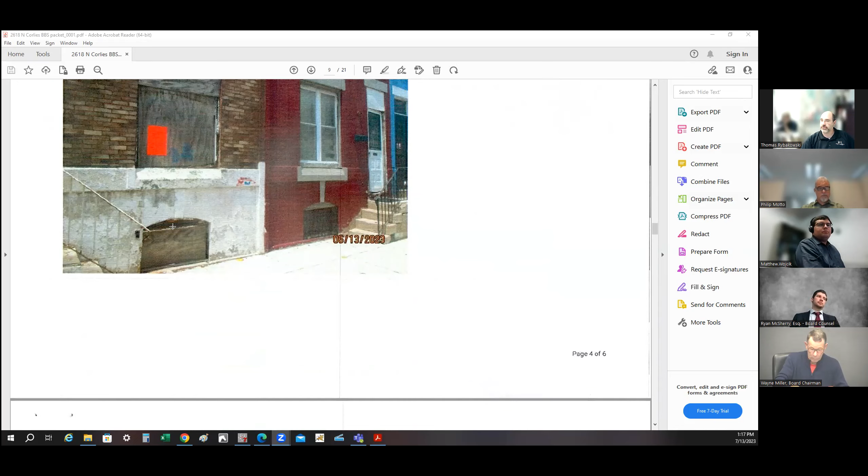It's a little blurred, but it does show the posting of the front of the property. That's a photograph of the front of the property with the posting on the front plywood that would be affixed to where the front window would be.

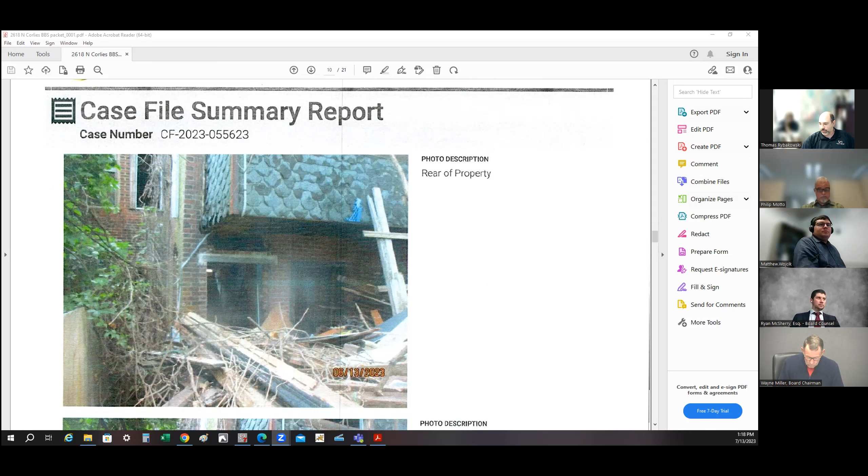This is one of the areas of concern: at the rear of the property, you have an opening in the rear exterior wall where a lintel looks to be in the process of being replaced, but there's an opening above that. And then you also have an opening in the exterior wall on the breezeway above in that masonry wall. That's another illustration of the back of the property.

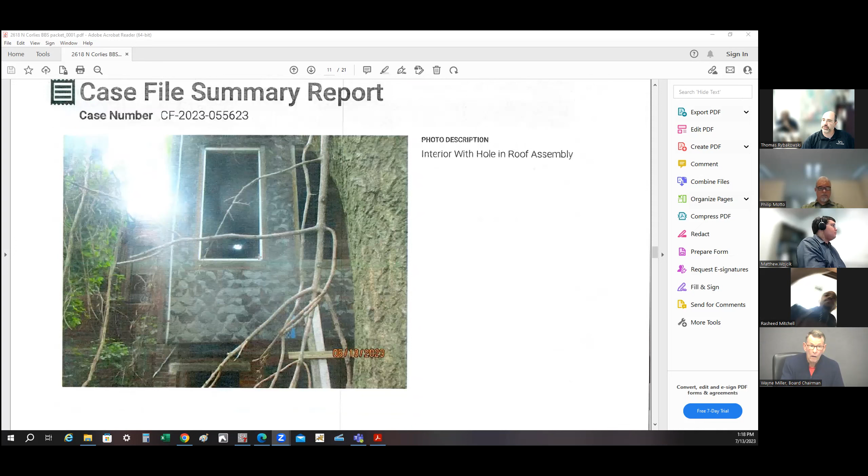This is a photograph taken of the rear bay showing that there is an issue with the roof assembly of the property.

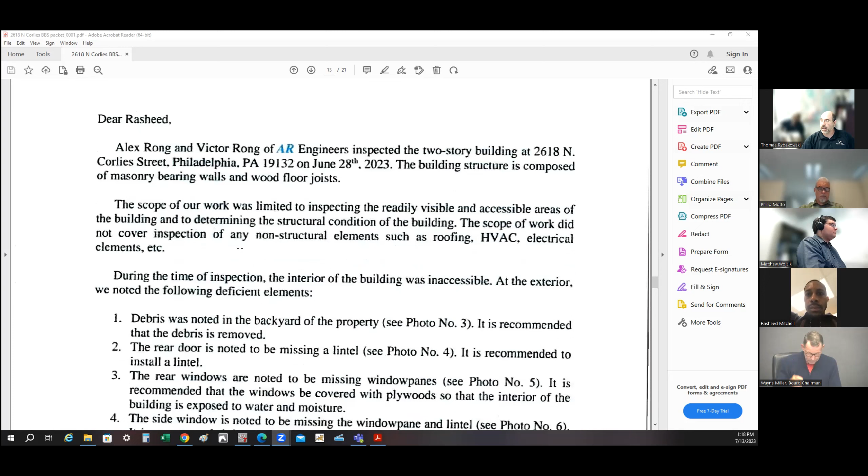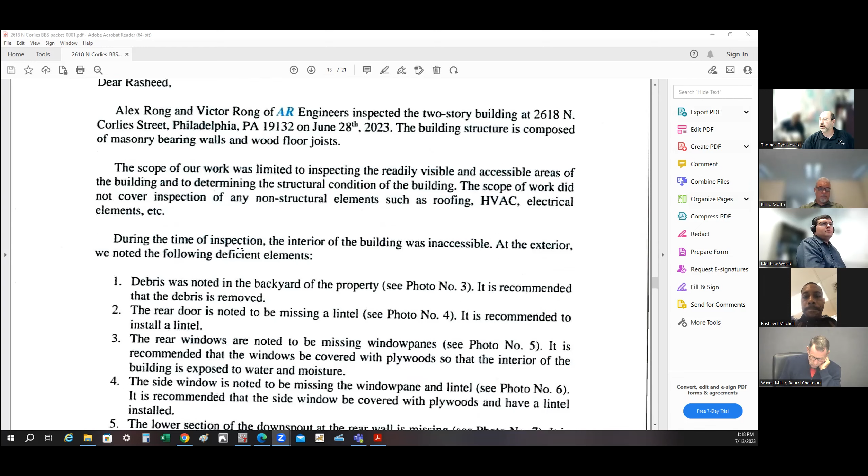This is the engineer's report that was provided to the department. The engineering report is dated July 7th, 2023, and was conducted by Alex Rong and Victor Rong of AR Engineers, who inspected the two-story building at 2618 North Corlies Street on June 28th of 2023.

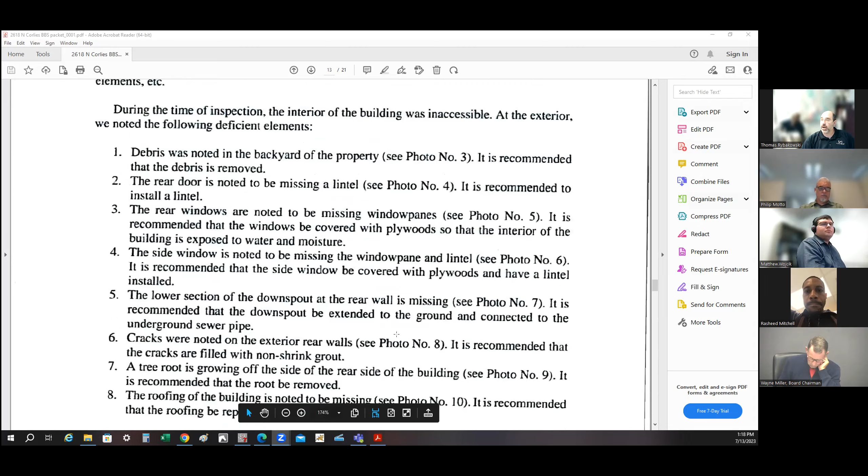It gives a series of 8 different bullet points that they would like to be addressed. In the description above the 8 bullet points, it states that during the time of inspection, the interior of the building was inaccessible. At the exterior, we noted the following deficiencies.

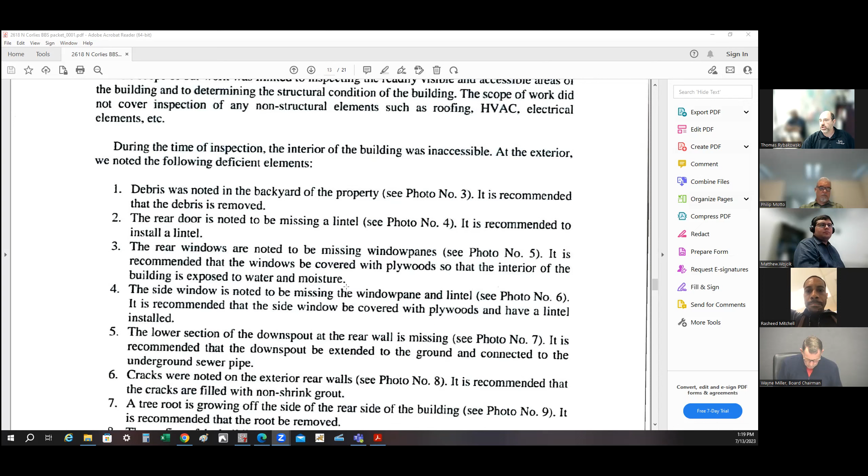You can see from the rear of the property that there is an issue with the main roof. Bullet point 8 shows the roofing of the building is noted to be missing. See photo number 10. It is recommended that the roofing be repaired and installed.

The engineer himself states in the document that they never made entry into the property, so we do not know the extent of the repairs needed. The property has been deemed imminently dangerous.

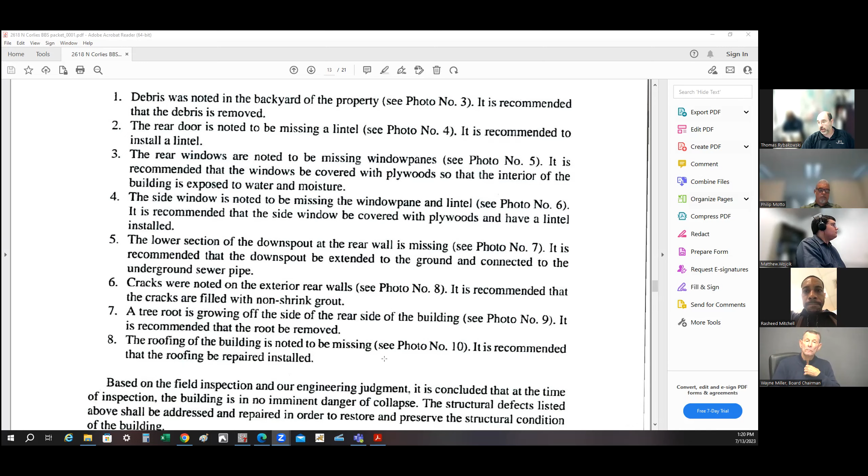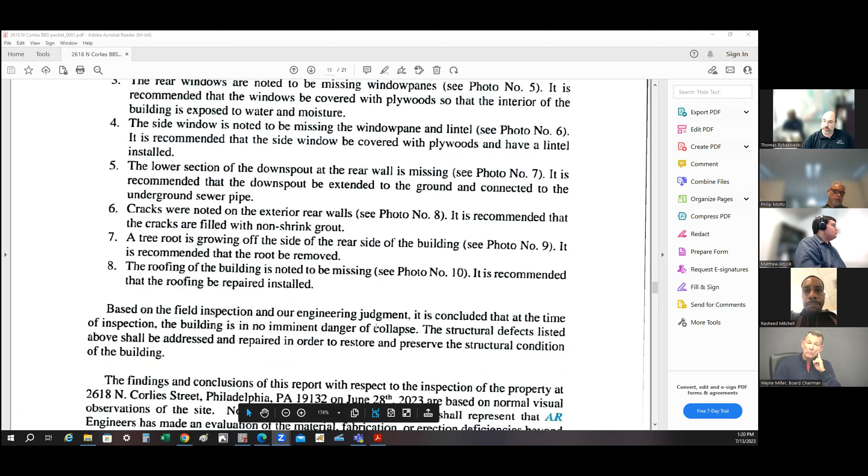It is a 2-story row home in the middle of the block. It does pose a threat to the public and to any occupant. With that said, we would be looking for an updated engineering report for the interior and exterior conditions of the property, and also plans for the repair, given that this property was deemed imminently dangerous.

We are looking for a permit to be submitted and under review in the department's hands within 30 days. Okay, Tom, I have a question for you.

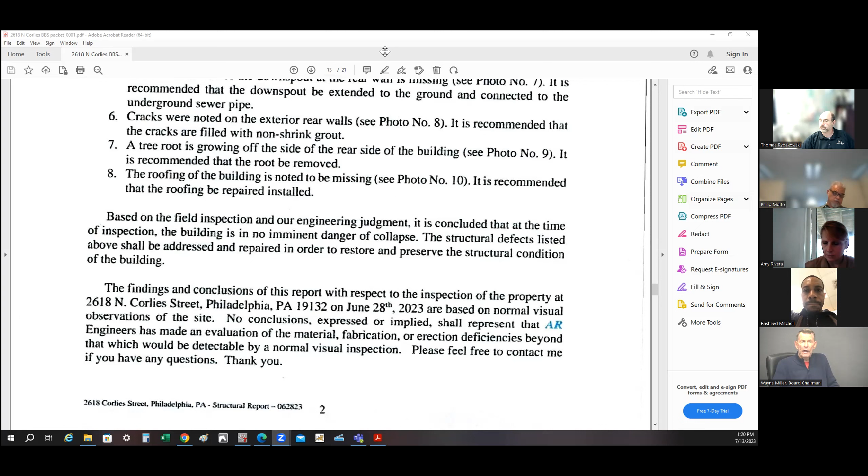Given that there was only a visual inspection by the engineering group from the outside, would that suffice, or would they have to have another one after they got inside? There would have to be another one, because of the violation itself—I'll go to the violation.

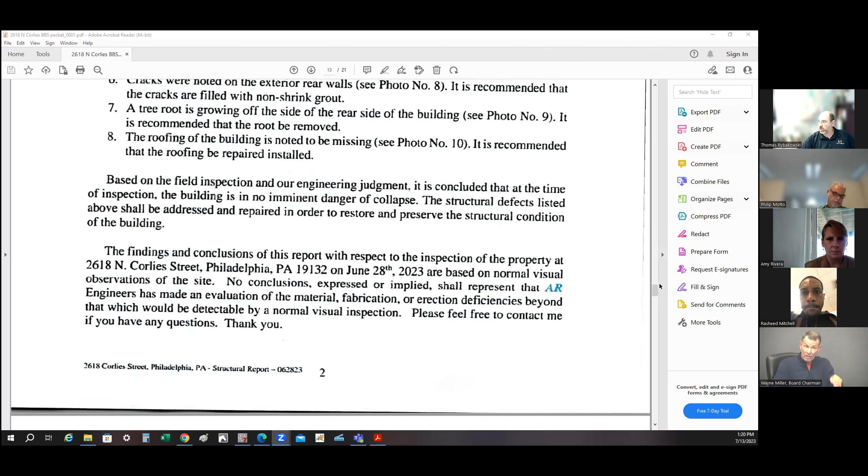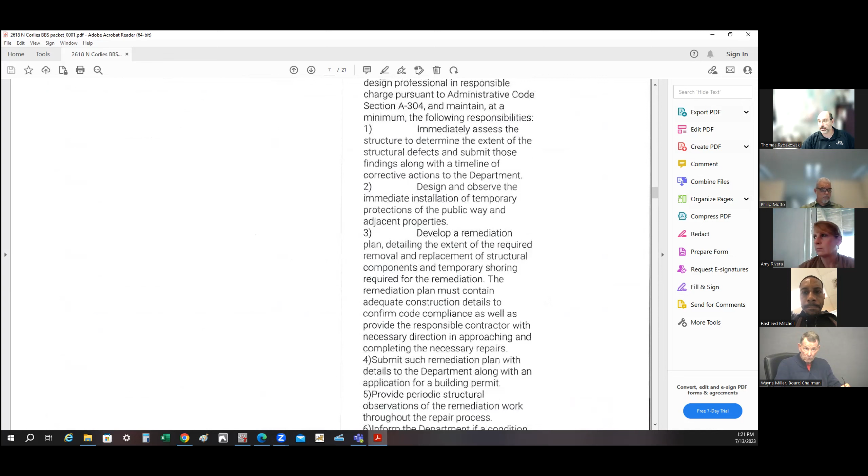The violation notice indicates that the entire property has been deemed imminently dangerous. The next violation asks for an engineer, or design professional, to survey the entirety of the property, meaning both interior and exterior.

Specifically, the inspector asks for the exterior walls to be addressed, then the interior to be addressed, and the roof assemblies. So we would need very specific detail on all the structural members of the property.

With that, the department rests. Like I said, we would ask for a permit to be under review within 30 days.

Okay, Mr. Mitchell? Yes, you're part of the hearing? This is my first time going through this. I've never been through this before.

So when the inspector sent out the letter stating that it was imminently dangerous, I tried to hurry up and follow the rules, and I went with the steps he gave me to get a structural engineer out there, and I got the structural engineer report. In the report, the structural engineer says that it's not imminently dangerous. So I don't know, what do I do?

I have to get him to come out again and do the interior—is that what he's saying? From what the inspector said, they were going to require the interior and the exterior again for an engineer's report, and that's where you have to start.

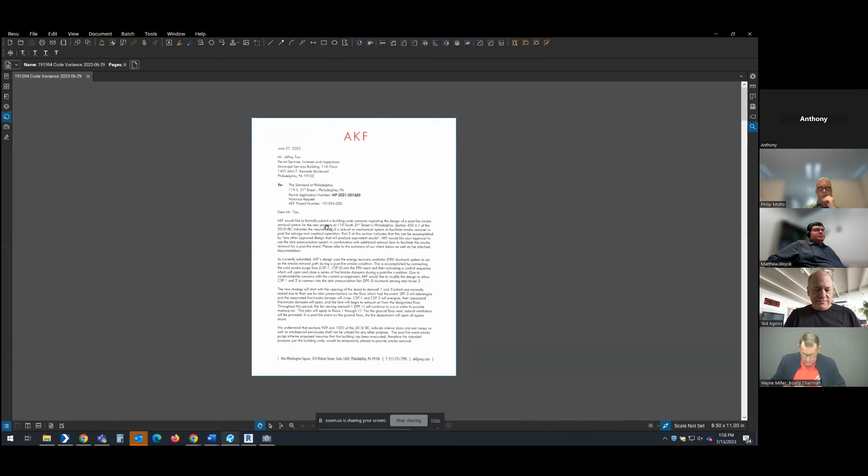So what we want to present today is a variation to our post-fire event smoke removal strategy. What we have submitted in the township currently is using a cold smoke purge fan on the roof in combination with our ERV, our energy recovery system, to both make up and then exhaust the air during a post-fire event. This is obviously on a floor-by-floor basis.

What we ran into is some constructability issues with shaft sizing as time went on, and we wanted to see if we'd be able to apply for a variance, in which case we would be able to use the cold smoke purge fan system through the stairwell to use the stair system to evacuate the smoke. So on the next following pages I will show you a schematic design of what we're proposing here.

So again, I'll just read through this. It's currently submitted: AKF's design uses the energy recovery ventilator system to act as the smoke removal path during the post-fire smoke condition. It's accomplished by connecting the 2 fans into the ERV risers and then activating a control sequence, which will open and close a series of fire smoke dampers during a post-fire condition.

Due to constructability concerns with the current arrangement, AKF would like to modify the design to allow cold smoke purge 1 and 2 to connect into stair pressurization fan SPF 3 ductwork serving stair tower 3. The new strategy will start with the opening of the doors to stairwell 1 and 3, which are normally sealed due to the use for stair pressurization on the floor which had the event.

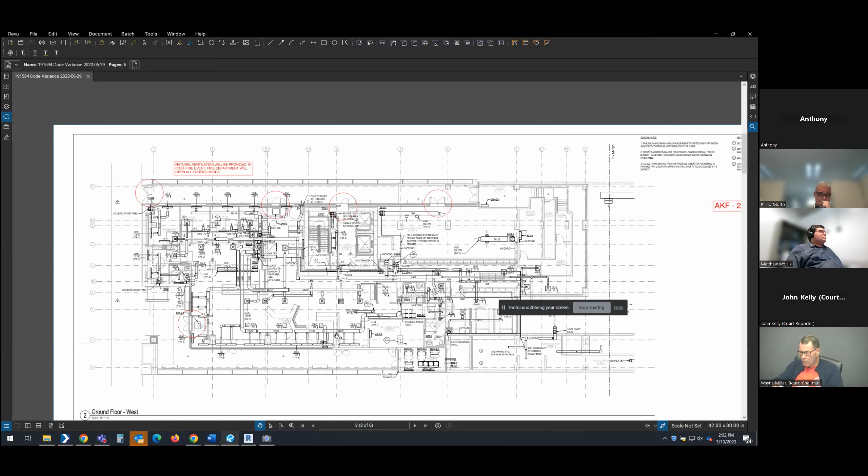As we come up to the second floor and all the floors above, floors 2 through 17, what we would like to do is have this stair pressurization. So let me start by showing you where the scheme is. This is half of the floor plan, and the other half is down below. The match line is in the middle here.

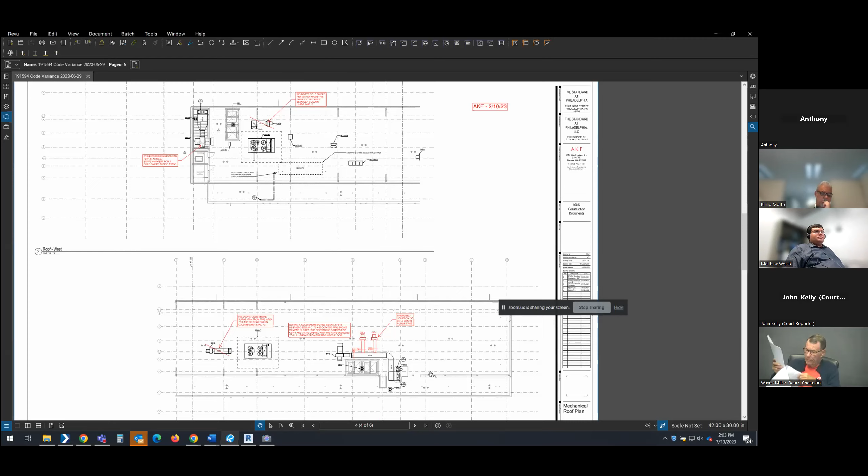This stair pressurization fan, SPF 1, during a smoke purge event - again, just want to reiterate that the building would be fully emptied at this point - would then energize to provide makeup air into the space. The door on the respective floor would be opened up, and then these fans over here, which are connected to stair tower 3...

And we're not using the stair pressurization fan here. The cold smoke purge 1 and 2, the red fans that were added to the upper side of the duct, is what he's referring to. Correct, yeah, these 2 fans here.

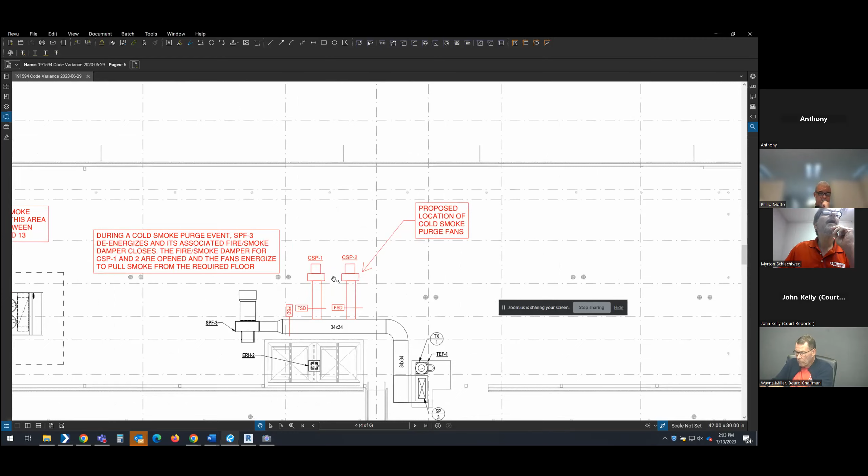We would relocate these fans, tying them into the existing ductwork for stair pressurization fan 3. Stair pressurization fan 3 would shut off, the fire smoke damper to that fan would close, and these 2 fire smoke dampers connected to the cold smoke purge fans would open up. Then we would use this ductwork system, within stair tower 3, to provide the exhaust for the specific floor.

So again, the sequence would be: the fire happens, the fire has been extinguished by the firefighters, and the firefighters are now just looking to remove the smoke from the floor. They would come up to the respective floor.

The stair pressurization system would be shut off, the doors to the respective floor would be opened up, and then stair tower 1, with stair pressurization fan 1, would be supplying air as makeup, while cold smoke purge fan 1 and cold smoke purge fan 2 would be energized to remove the smoke from that respective floor. That's the overall intent of the system we're asking for.

I also just wanted to mention that this is a building that is fully evacuated at that point. There are no occupants inside besides the fire department in this instance. This is a post-fire event, so these stairs are not being used for life safety at that point in time.

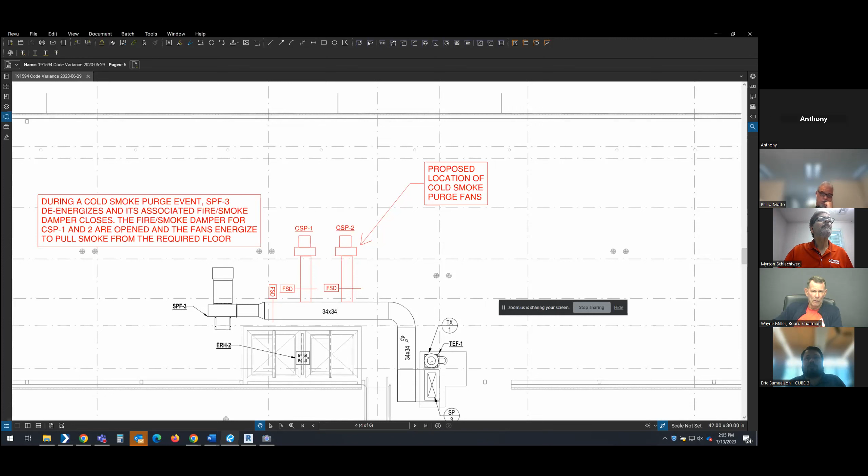Thank you, Eric, that's exactly the key point. I didn't know the building would be fully evacuated. Because the event of a cold smoke purge means the event is already over at that point, so the building needs to be evacuated.

And if the firemen weren't there to trigger it, what would happen to somebody in there? Yes, this system is initiated from the fire command center, at the direction of and in coordination with the firemen who are responding to the emergency.

And this sounds like a new system. So how do they know to do this? There's a fire command center on the ground floor, and there's a sequence of operations for emergencies, including this.

So is this done on a floor by floor basis? Yeah, so the system, if there was a fire just on floor 7 per se, you could open the stair doors on 7 to evacuate smoke on that one floor. If it was more than one floor, you could go floor by floor by opening the stair doors and treating it that way.

Oh, you would do that manually? Correct. That would be done manually by going to the floors and opening them up, where the event took place.

It's important to note that the overall function of the system is not changing from the original design intent, which is to evacuate smoke from an individual floor as required by code. We're just requesting a change on how we're actually doing that, using the stair towers as an option for smoke evacuation.

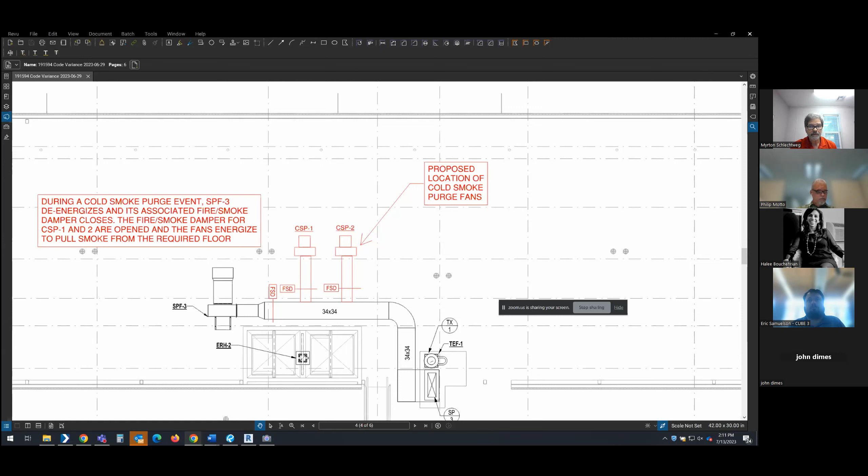It would be imperative, right? You don't want to start purging smoke up fire towers, stair towers, which is supposed to be the way to get out of the building, then somebody else opening up doors and going onto other floors. So there are things that would definitely have to happen. But yeah, we have done it. We do it as a fire department still to get smoke out of buildings. It seems to me we have no alternative, because with the structure of the slabs and the tension rods in there, if we cut them out we've got a problem. So this works just as well.

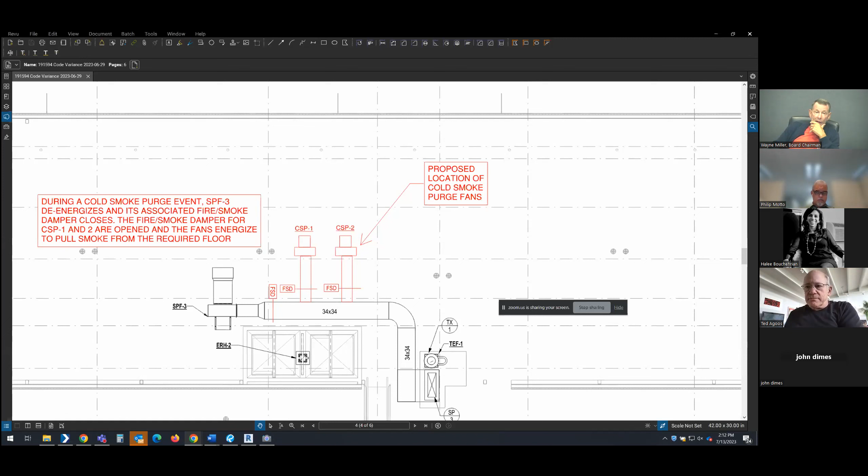Okay, I don't have a problem with it. I don't know about the other board members. I'm okay with it — better than breaking all the windows. Yes, exactly. That's what we were trying to prevent — glass coming down 12, 17 stories. So we're good with it.

All right, anything else? No sir, I think that's good. So the process is you all exchange information with L&I and then they modify their refusal — is that what I understand, or am I correct in that? How does that get acknowledged? The board makes a recommendation to the commissioner, and the commissioner approves or disapproves it. Then it goes to you guys and the plans examiner.

All right, thank you. Mr. Miller, you're on mute. Sure, a lot of people would like me to be on mute, but okay, good luck guys. Thank you very much everyone for your time. Thank you, great, thank you members of the board. Thank you everyone. Have a nice day. You too, thank you.

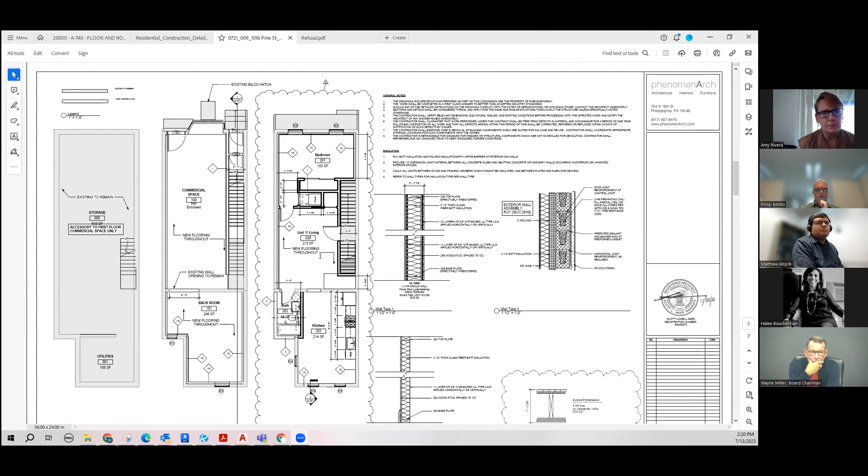Okay. So we had gotten a refusal for this multi-residential renovation at 1016 Pine Street because of an egress issue. We had initially — this is the floor layout, a 3-story building with a basement, first floor commercial space, second floor one apartment, and the 3rd floor is another apartment connected to the attic. We had also proposed an addition on the 3rd floor. Let me show you on the 3rd floor in the back, which we had initially in our first plans as a bedroom. However, the plan is such that the back doesn't have an alley to a public way.

It's landlocked, and we didn't have a means of egress from the bedroom.

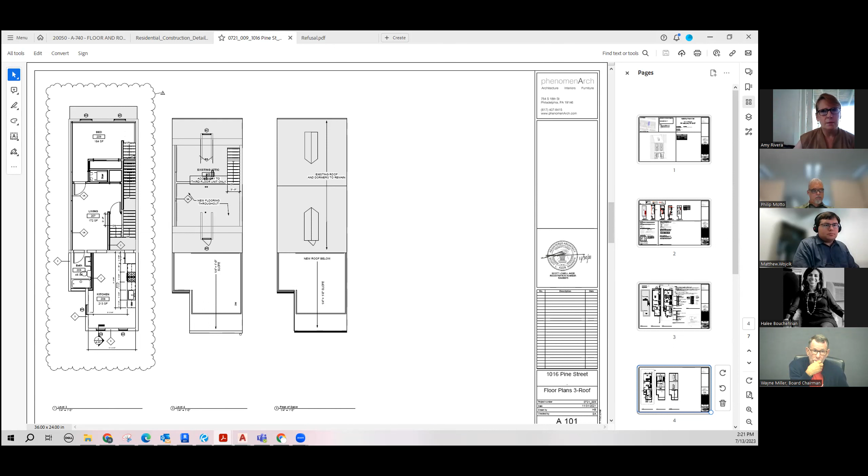So we came to the board and presented the situation. One suggestion was that we move the bedroom to the front of the floor plan and the kitchen to the back. We've done that consistently on both of the living floors. Level 2 now has the kitchen in the back and the bedroom in the front.

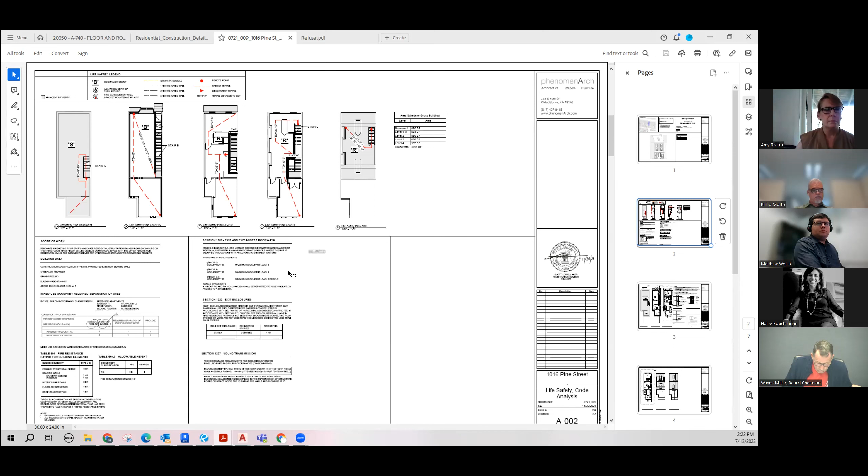The life safety calculations remain the same. They're all within the 75 feet of egress. There's a direct way from the bedroom to an escape window, and then the regular egress calculations apply. Any egress through the windows or a ladder in the back would not satisfy the requirement to get to a public way.

The basement has a Bilco hatch, so that would be the emergency egress out of there. Given the vernacular of this building type, this is the solution that was suggested and that we'd like to present today.

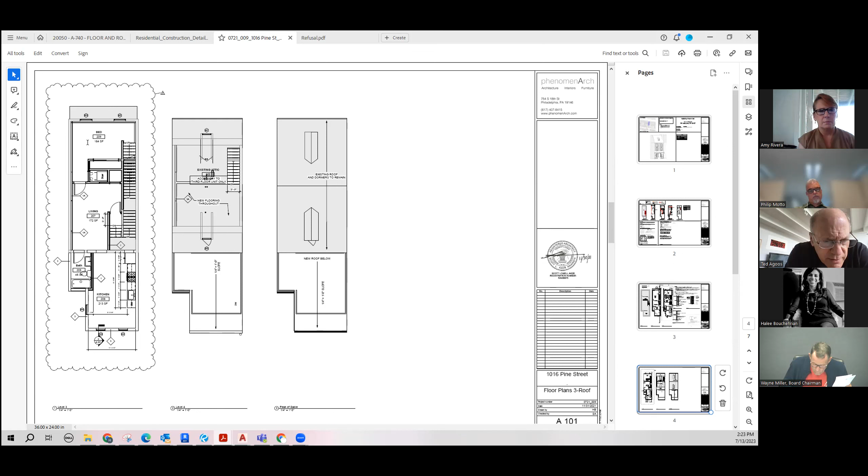And what happens on the 4th floor? Is that just one? Yeah, the 4th floor is existing attic space for storage. It's accessory to the unit on the 3rd floor. Okay, great.

This appears to address the concerns, right? John, any issues? No, I don't have any issues. I think this is what was suggested, right? Correct, yeah, yes. Thanks for brainstorming with us last time. I think that's an agreeable solution.

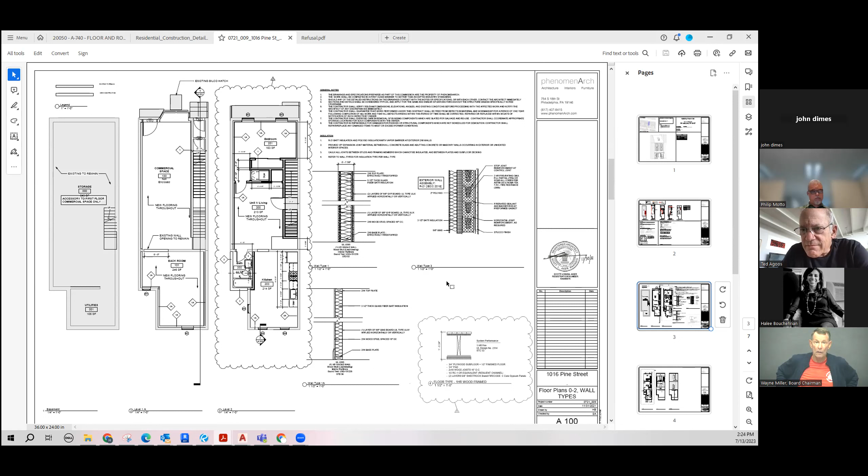Amy, Ted, anybody have any questions with it? Yeah, I just want to double check that the 4th floor, even though it's not a sleeping room, doesn't need a second means of egress. Well, it wouldn't need the emergency escape and rescue opening because those are only needed below the 4th story above grade plane. But as far as that 4th-story attic, does it need a second exit?

The only thing would be if it's exclusively accessible from that 3rd-story unit, then the travel distance would just need to be limited from the remote point of that 4th story to the unit entry of the dwelling unit at the 3rd floor. Okay, and that's been verified that it meets the travel distance. I didn't review it, I don't know if it would comply with that. Well, the architect has said it does.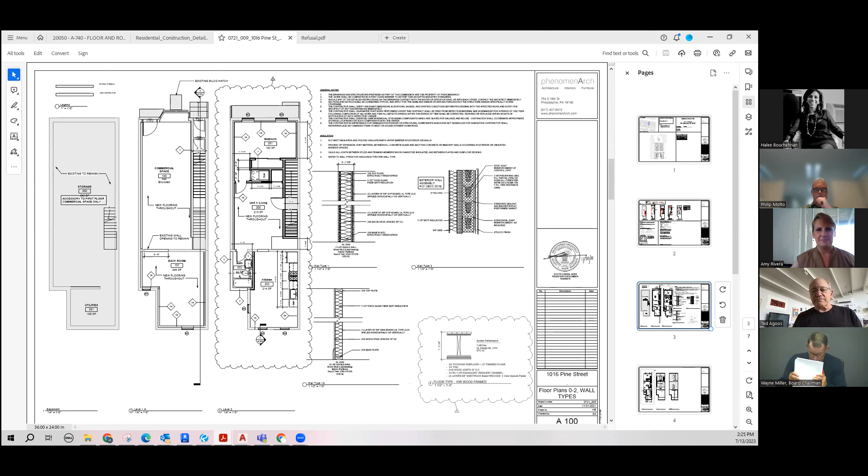Okay, so are we good with this? Yes, yes, yes, okay, good luck. Thank you. Okay, thanks, you're welcome. Thank you, guys, bye, okay guys.

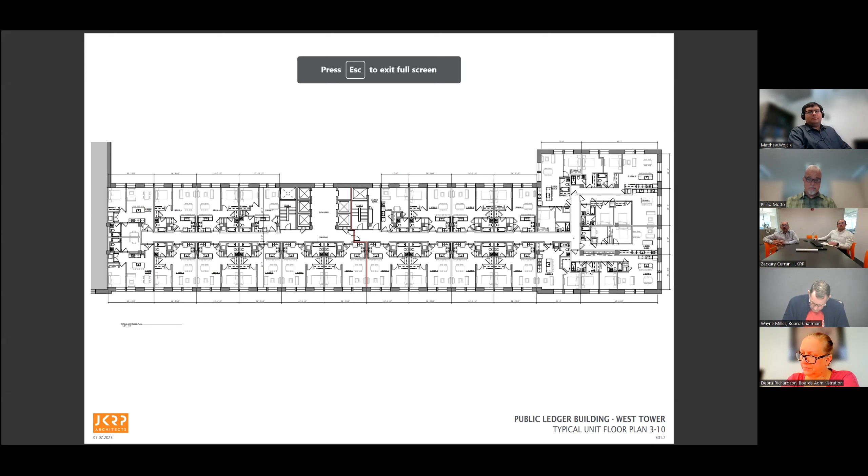Okay, let me pull up a drawing if I may. Certainly. The public ledger building, if you're not familiar, is a J-shaped building. This is the Chestnut Street Tower. The building was subdivided into two different condo units, essentially. The building that faces 6th Street is one condo. It goes up 6th and back along Sansom, and our client, Shia Sturm Baycrest Management, owns the piece of the building that runs along Chestnut Street. So that's what we're looking at here.

There's a 3-hour separation that runs on the left-hand side between the two buildings that was built as part of the condo. So this is essentially a separate building. The building was built in '27. It's a Horace Trumbauer design. It is currently ground floor retail.

There's a Wawa on the 1st floor on one side and office. The Philadelphia Center City District has their offices there. And in the middle is an access point which goes to the elevators that you see at the center. The elevators have stairs on either side. Those are the exit stairs for the building.

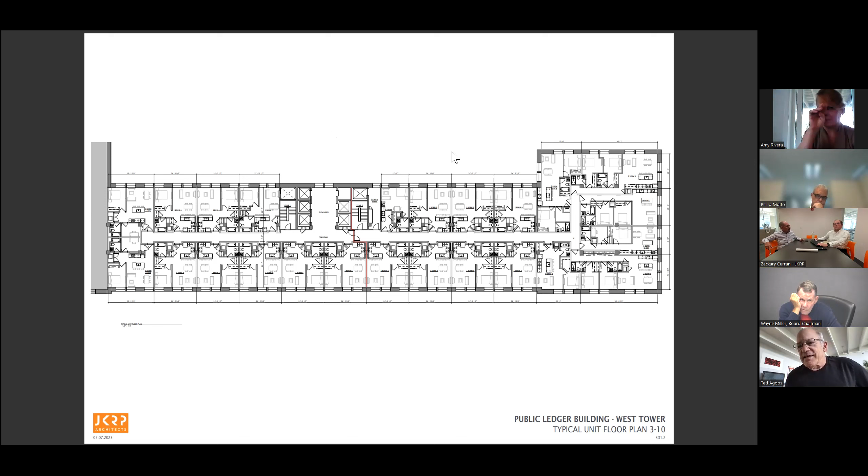Do we have a first floor? Can we pull up a first floor plan, Zach? Give us a minute, we'll get a first floor plan. It's easier than trying to walk you through it.

Yeah, Matt, just correct me if I'm wrong, but I mean that would be a refusal item as well, to have to re-enter the building. I think this is where you'd come out. No, on 7th Street, we're not re-entering the building. No, there's none, let me get you this first floor.

Well, again, we submitted this for preliminary review, happy to come back to you if that's needed. I mean, that's the existing condition, that's been that way since the building was built.

Both buildings exit, they do access the lobby, but they also access, pull that up again, and just check if that's one of the sections that has to be complied with. I misspoke, one of those stairs exits through the lobby, the other exits through the back. You can see this is the two stairs. So the one exits through the lobby, the other one exits out the back.

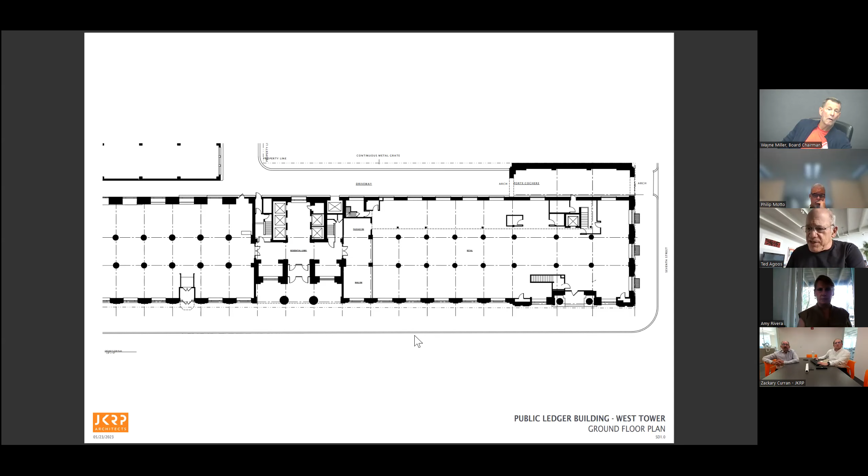Okay, but going back upstairs, John, you should probably weigh in on this. I don't know if there's any other solution in the building - you're going to core drill through the whole stories to do the stair tower at the end, but remoteness of exits is in the code for a reason. You have an event, fire, smoke, or other - you just don't want all your exits at one spot, you want to go to different spots. So I'm stating the obvious, but I can't think of another solution. I think you guys have come across this before, and what you're proposing is the solution I remember.

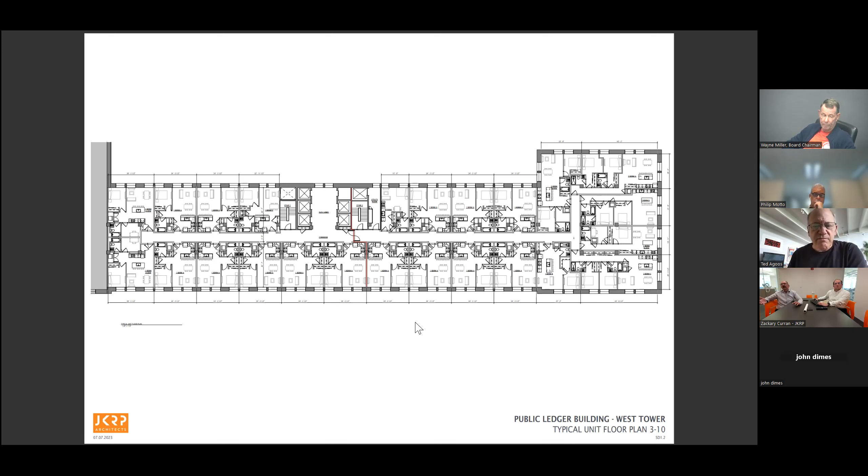This way at least you've got a separation between the two sides, so if there's something on one side, it doesn't contaminate the other. Those doors are on hold-opens, and in the event of a fire they close. Does it make any sense to have another set of doors closer to that other stair tower as well, to kind of keep the elevator tower separate - to run another set on the opposite side? Yes, we could do that.

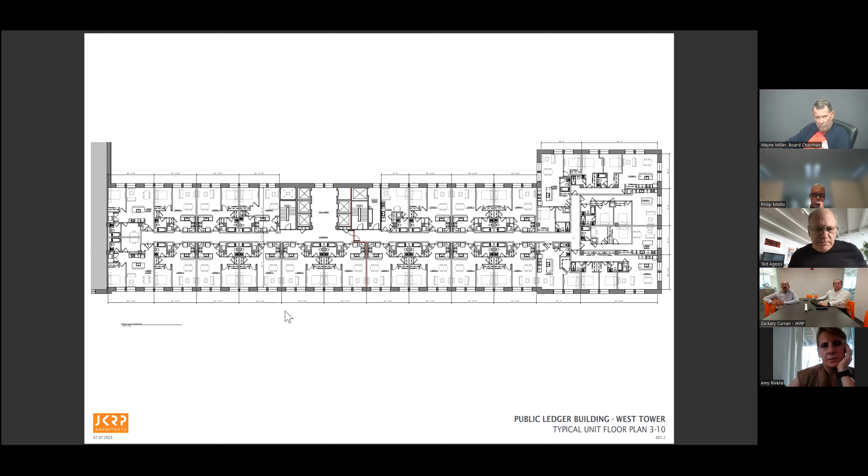John Dimes, does that make any sense to you? Yeah, that would work. You still don't have a classic elevator vestibule because you've got units that open off of that, and that whole area is all marble and marble floors, and I'm reluctant to start mucking with that elevator lobby.

Will this be condos or apartments? Apartments. Seems like it's mostly one bedroom with a couple two bedrooms. Yes, that's essentially what it is. It lays out pretty nicely - these are pretty decent sized units, they're 650, I think.

So it should be a nice accommodation. I think Washington Square seems to be getting a slightly older population, and this is certainly an attractive location for somebody who wants a bigger unit. A lot cleaner than Washington Square than 18th and whatever that other park is down there - that place is a dump. Washington Square is nice.